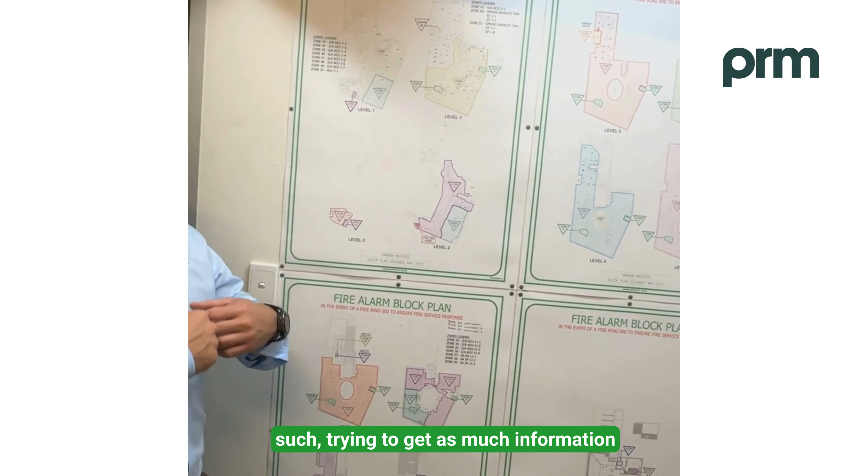As such, trying to get as much information out to your team about what's going on and what you want them to do would be brilliant to do. But amongst it as well is determining where this situation is occurring, so that the first arriving crews, you can inform them as to what's going on, what you've done, and what you need.

It's common in emergency response, emergency control organisation structures that you have someone in the team that would actually take the service to the fire floor to determine what's going on. And this is where these zone maps can be so valuable.

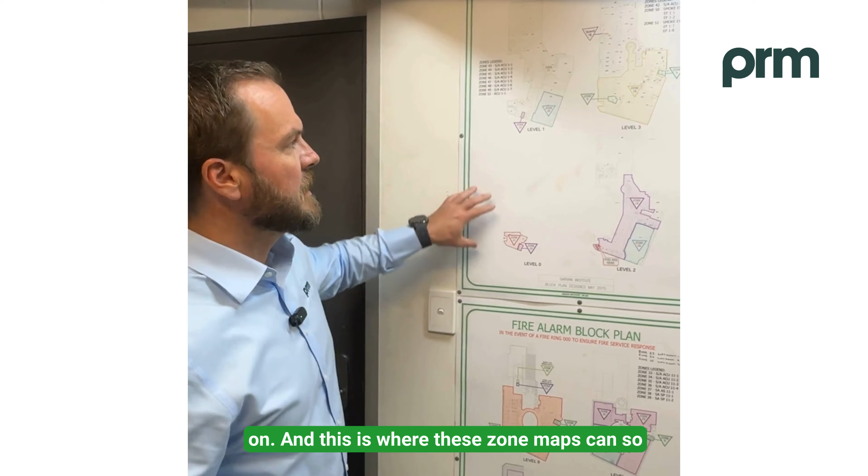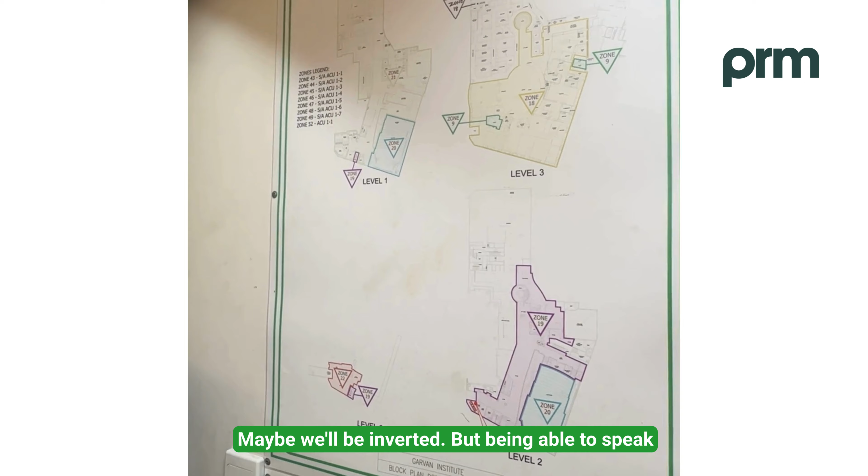So the chief warden or someone down here, it's great if they can quite clearly say, look, we're on level 2. This is where we are at the fire indicator panel. The activation is actually on level 3, one above, and we're on the southern side. That's the northern side, for example. May well be inverted, but being able to speak geographically, but also in relation to streets - so we're on Burton on this side. Best point of access is to go from the other side and access through the fire stairs.

We have the keys to those. We'll take you there right now. We can head straight up.

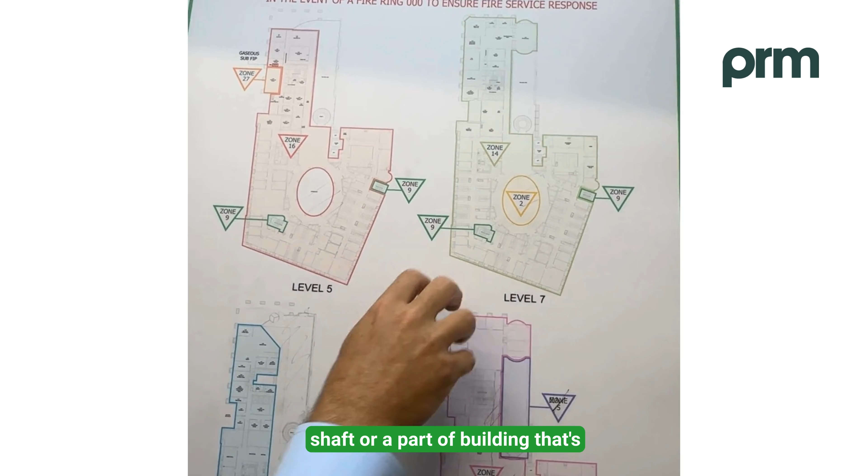Aaron, can you explain why there's different zones within different levels? Good question. You can see here zone 9 is repeated throughout multiple floors, and that's telling us that's obviously a shaft or a part of the building that's penetrating through all the floors.

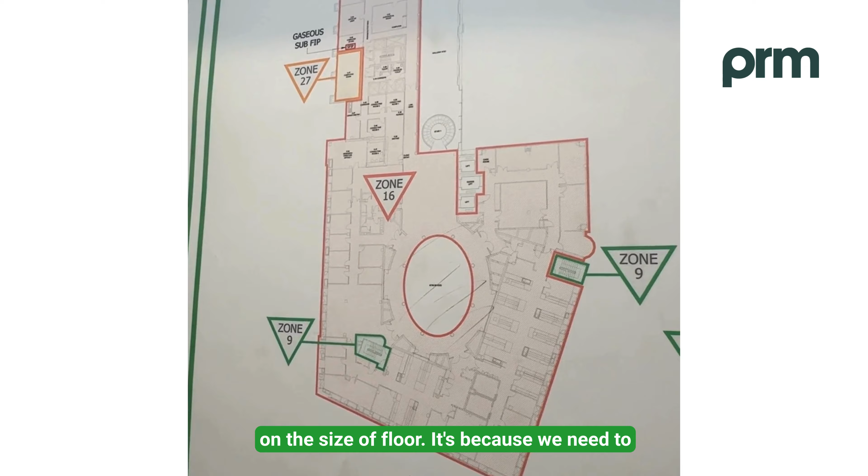When we have a look at our zone list over here, we can see zone 9 are the fire stairs, both north and south. The reason we have fire stairs in different compartments, and if we were to look a little bit deeper onto the floor, we'd see fire doors or smoke doors in there, depending on the size of the floor, is because we need to be able to egress, but also surge up to a floor, whether it be an emergency response team member, but more likely a fire service. You want to be able to surge up to a fire floor and be able to make entry on the clean side of the floor to then go across to the dirty side of the floor, which is the side of the floor that has the fire in it.

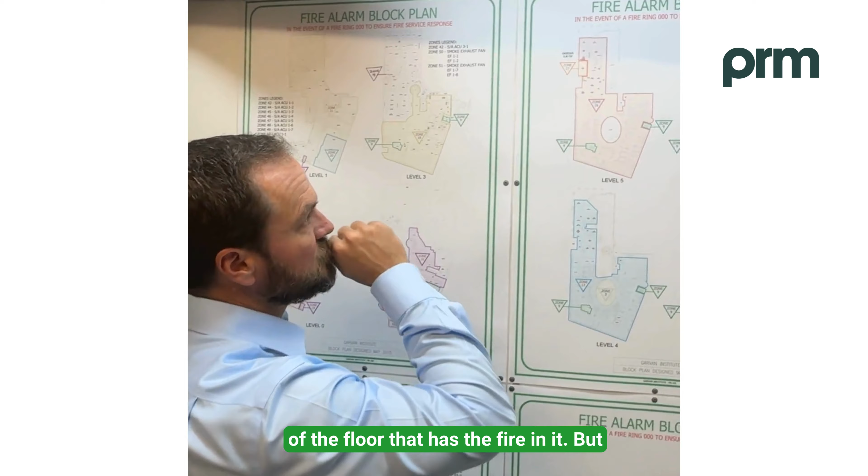But that's why we would often have these zones that go between multiple areas. Another place you might find that would be lift shafts. So I think you'll find a lift shaft somewhere through here - there we go, lift shaft detectors in zones. So that would be taking up, obviously, going right throughout the building.

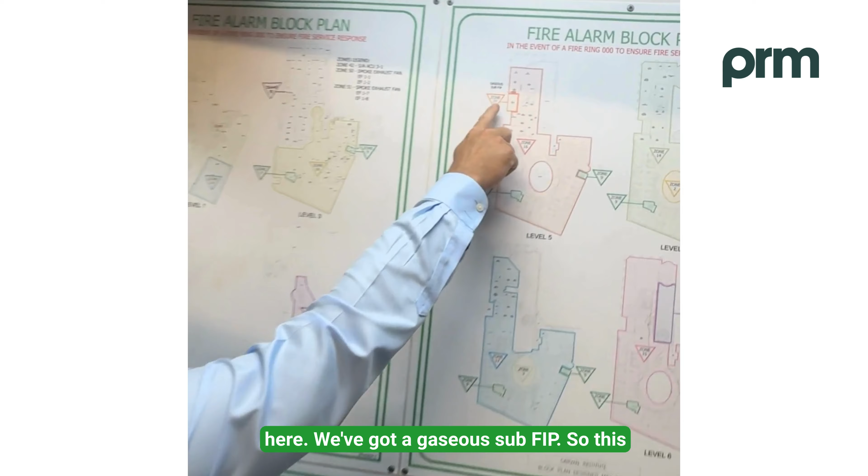We also have another interesting one here. We've got a gaseous sub FIP. So this sub FIP is its own zone, and that's where we would have a computer room, for example, and we would have a gas suppression system in there, which is going to dump an inert gas to put a fire out should a fire occur.